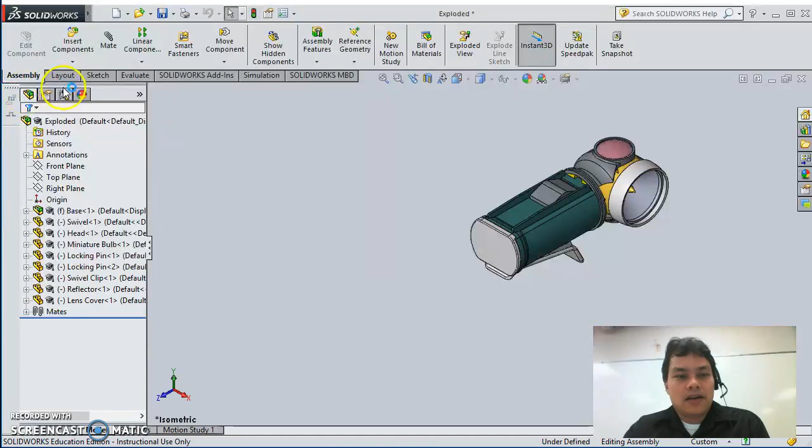that assembly component. We'll create this in a new configuration. So here we'll click on the configuration manager, right click, and then add a configuration. The configuration name will be explode. Click on the green tick. And we'll make sure that the explode configuration is selected. All right.

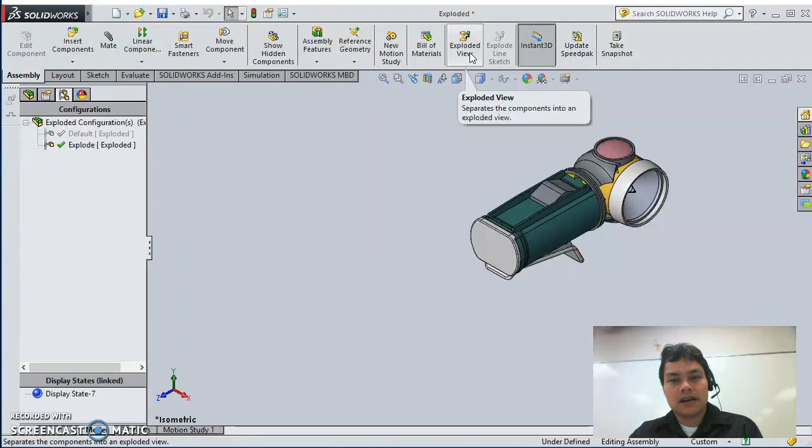Now, in the assembly ribbon, there is an icon called exploded view. So we'll be using this tool. So click on exploded view, and we're now going to try to explode a few components. The first one will be this locking pin number 1. So if we click on the locking pin, we can click and drag using the triads here.

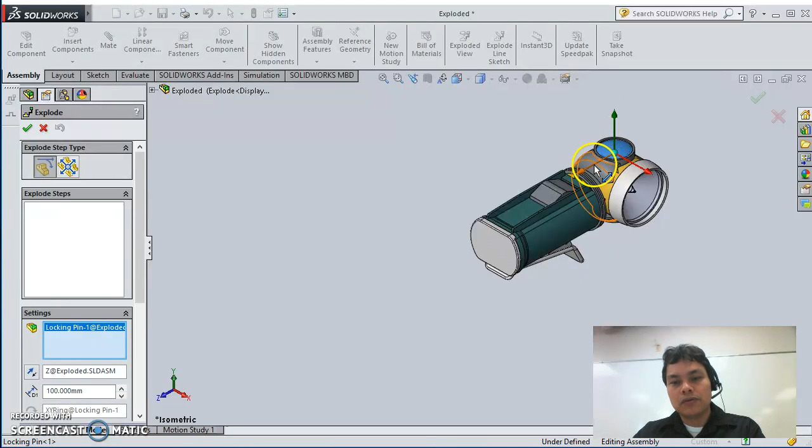So the blue arrow would move it in this direction here, in the Z direction. The red arrow would move it in the X direction, and the green arrow here is going to move it in the Y direction. For this case, I'm going to move this upwards around about 30. So you'll see a number 30 showing up on your screen. So it's about 28, 29, 30, around about.

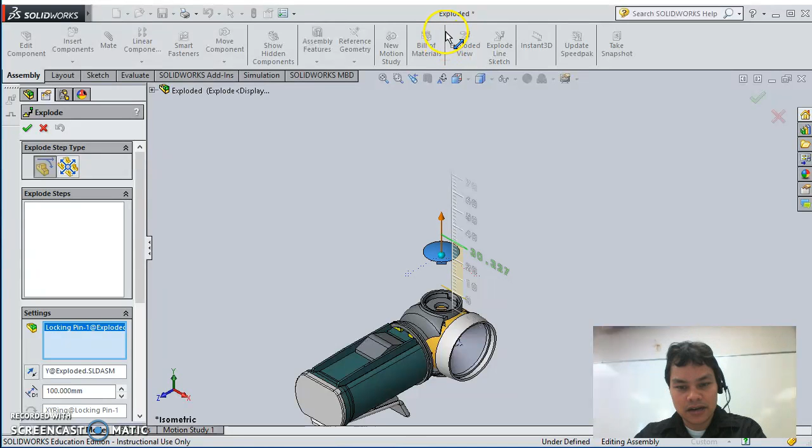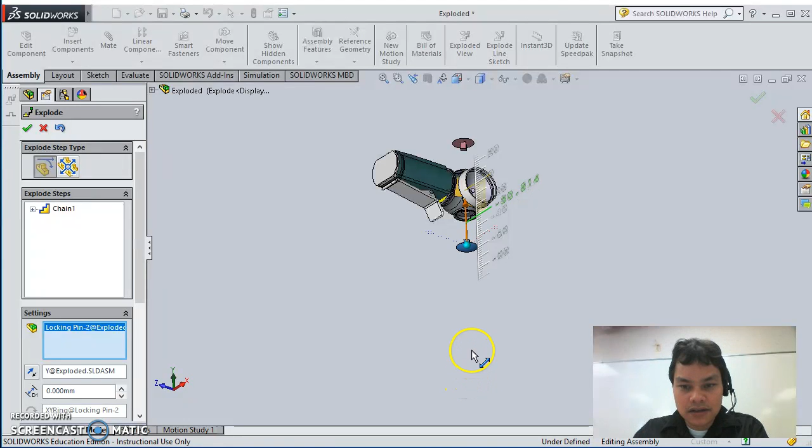Okay, we'll do the same for the bottom section. So we'll move this down around about 30 as well. So click and drag this down. I'm just using the scroll button to scroll in and out, and that's about 30. We can also explode assemblies. By the way, make sure you do not click on that green tick.

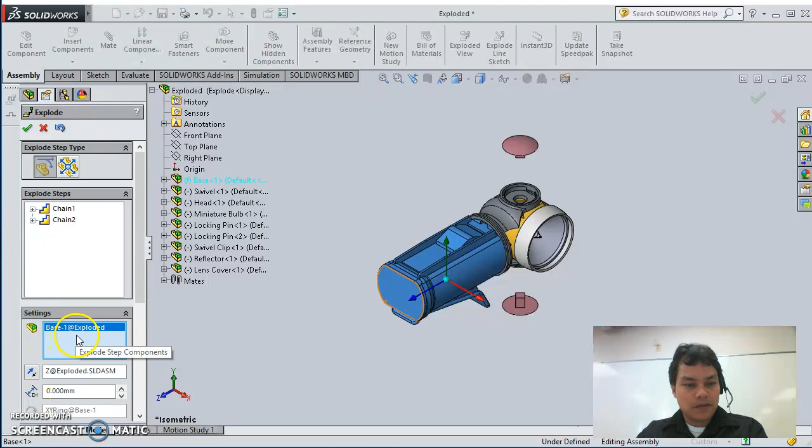Okay, so the base feature, we're going to move this base assembly. If we want to move it exactly a dimension, we can do it here. So we've selected the assembly. For the direction, I can click on the blue arrow. And for the distance, we can put in a specific value. This time it'll be 55 millimeters. Go to apply, and you see it all move, and then click on done.

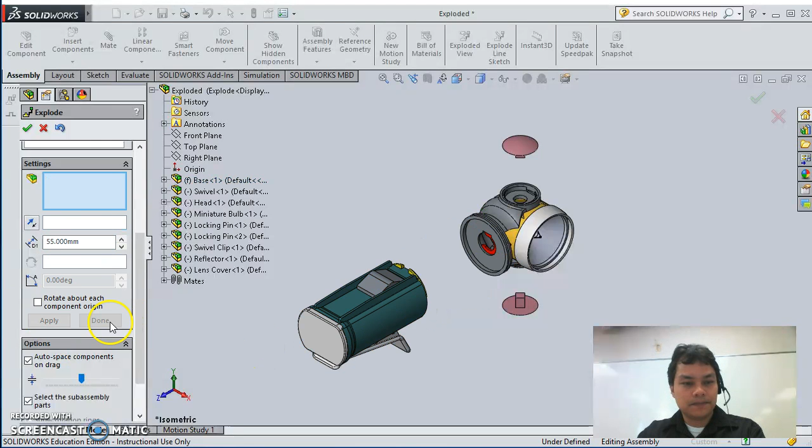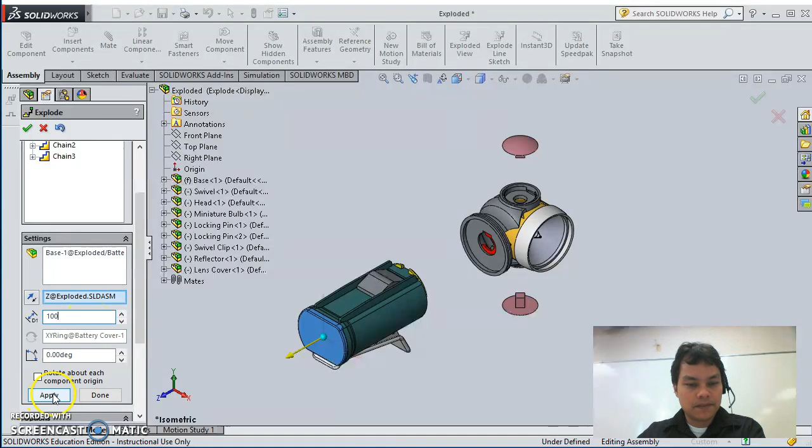All right, so just going to continue through here. Our battery cover, we'll move that in this direction, and the distance would be 100. Apply, and done. We'll move this component here, the switch, upwards, and the distance here will be 30. Apply, and done.

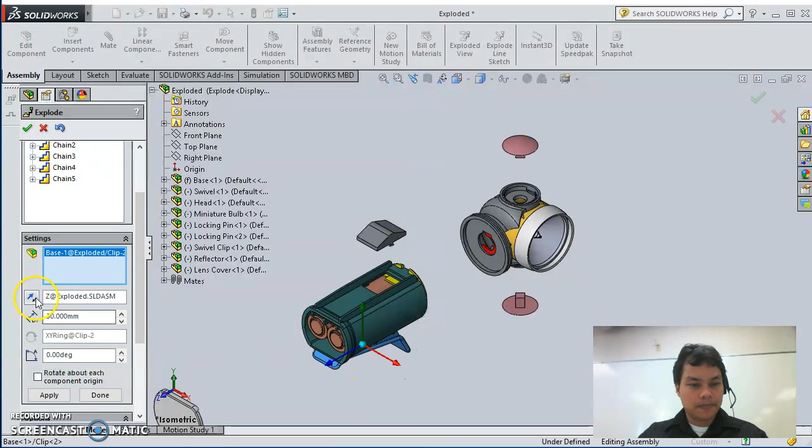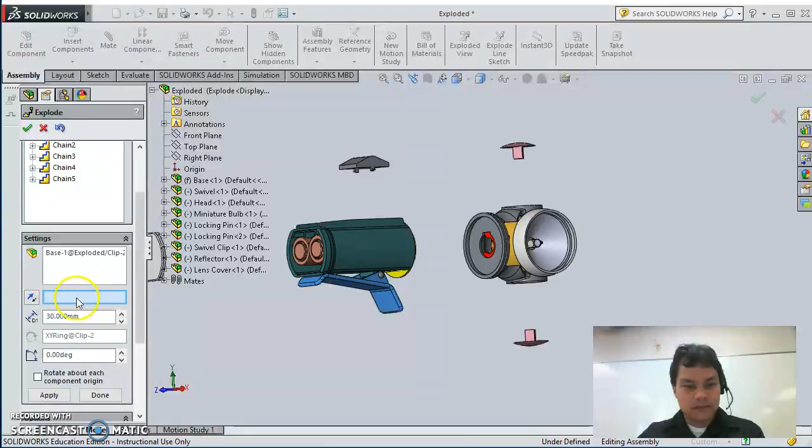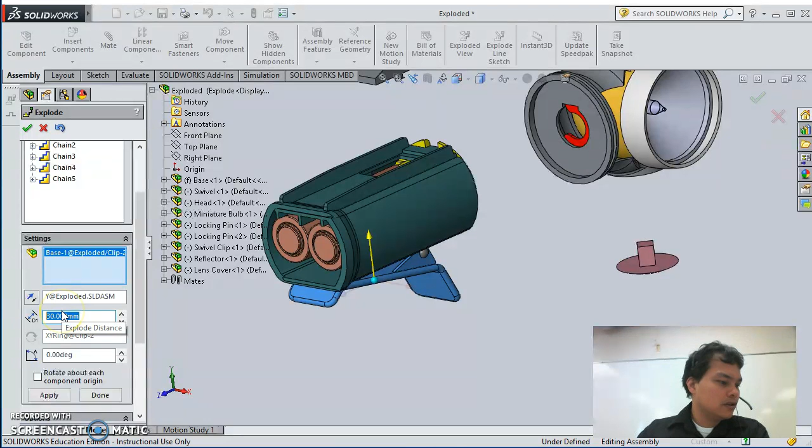We'll move this component here, the clip, in the direction of the green arrow. It looks like I've clicked on the face instead of the direction, so we'll just delete that and try that again. Okay, so click on the clip, click on the green triad, and the distance should be 30. Apply. We want it to go in the opposite direction, so we can click on reverse direction and then done.

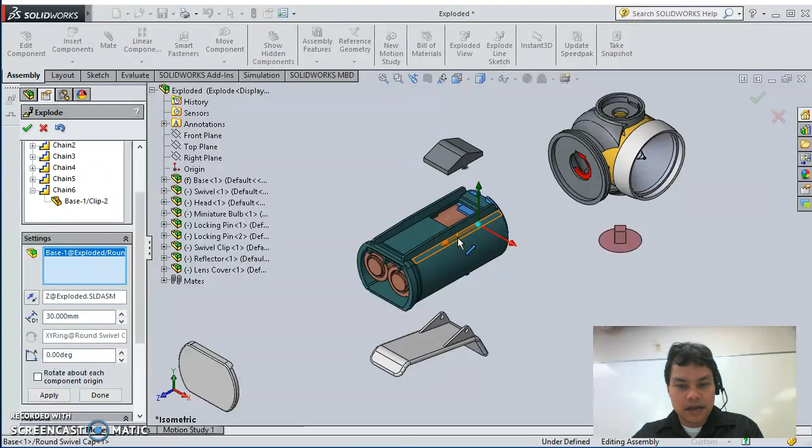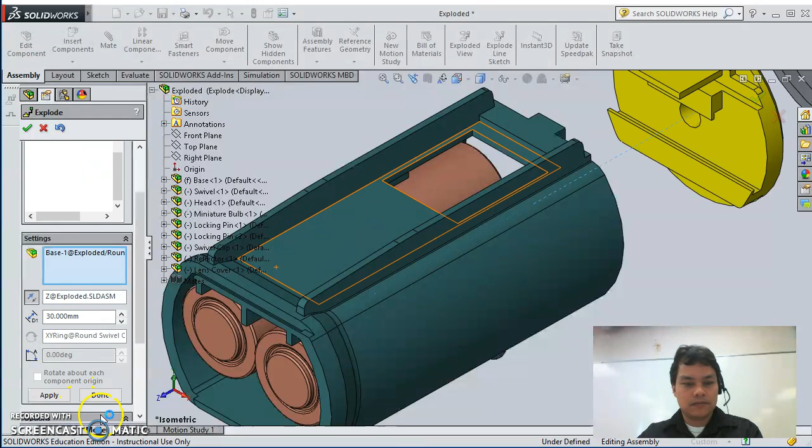Okay, and also we've got that yellow swivel cap. If we click on that, sorry. So that should be moving in the opposite direction to that blue. So click on the blue arrow. Try that again. Click on the blue arrow. And the distance should be 30. Apply, and it should be in the opposite direction. All right, and then go to done.

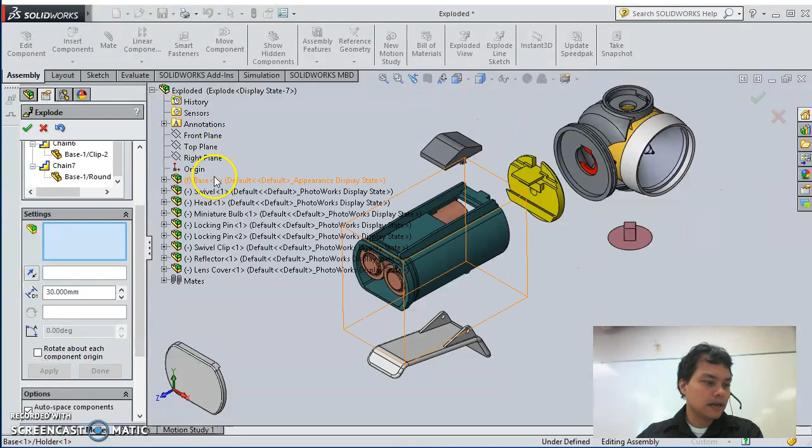Okay, and also there's a pin that should have been moved out as well. So let's see if we can find it. So the component, this one here, that should be moved in the direction of the red arrow and a distance of around 25 millimeters. Apply and done.

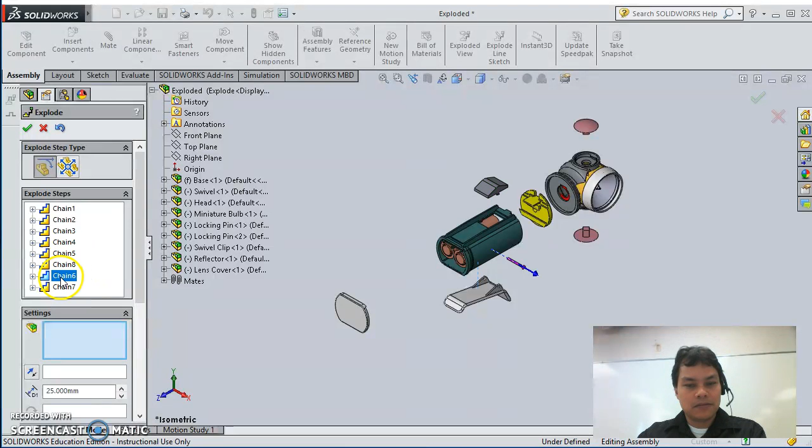Now, it might have made more sense for the pin to move before the clip. So what we can do here is change the order of when each of these movements happen. So for example here, chain number 6 is when the clip was moved. Chain number 8 should happen before then. So we can click and drag this up. And now we see the pin is moved and then the clip is moved.

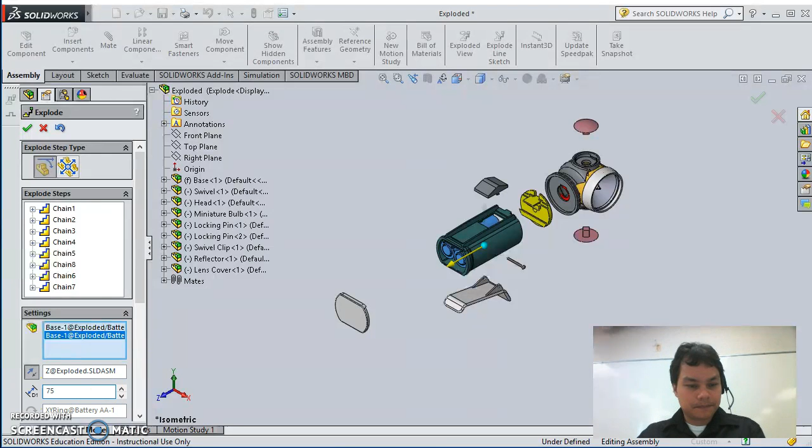All right, so we can also explode multiple components. So inside here we have 2 batteries, we can click on each of them. The direction will be in the direction of the blue arrow, and the distance will be 75. Okay, so apply. The direction should be the opposite way, and then click on done. Okay.

So the next thing we're going to be doing is we'll look at exploding the rest of this component. We'll do that in the next video.